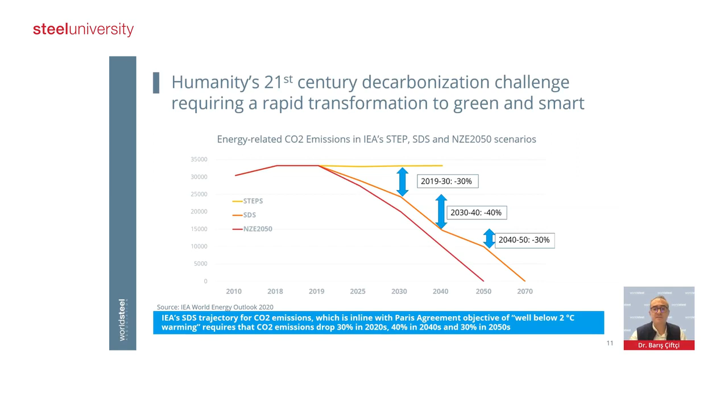And this has to be realized while the global population continues to grow, and probably while the global economy continues to grow too. Such a big challenge cannot be met without a complete green transformation of the world's basic infrastructure and basic economic systems, such as energy infrastructure, mobility systems, and buildings.

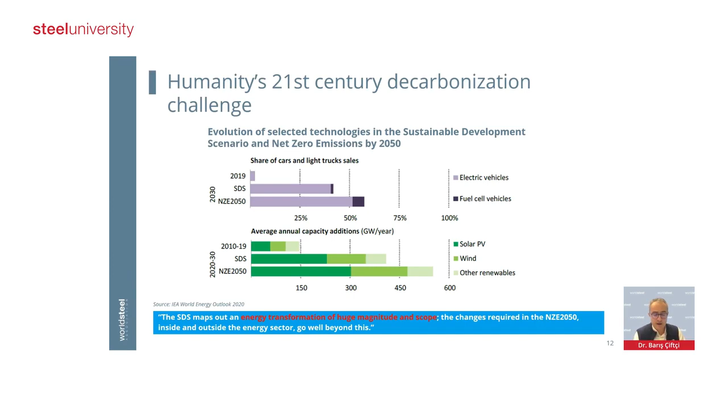We do not know if these targets or assumptions will be realized, but we know that humanity's efforts towards these objectives are going to intensify and accelerate going forward.

Next, I'd like to spend a minute on the new emerging geopolitical order. The geopolitical order of the last 3-4 decades can be described as a unipolar world order. And during this unipolar order, we have witnessed the rise of globalism, with increasing international trade and integration of markets.

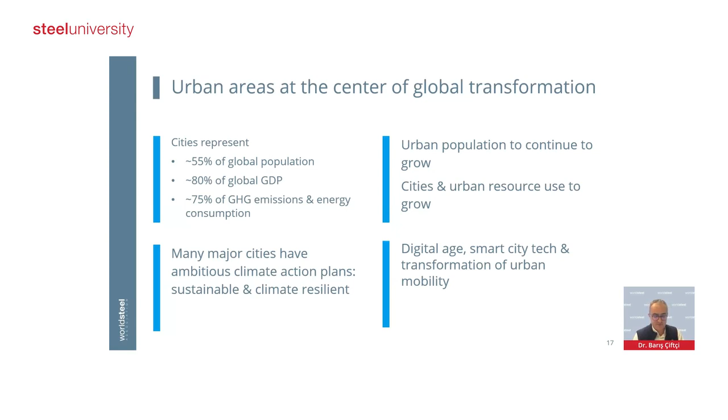First, we expect that governments and policymakers will aim to densify city populations around public transportation hubs, so there will be less need for transportation, especially with private vehicles. This would require building new public transportation networks, as we see in Paris with the Grand Paris Express project, and also allowing for higher buildings around the transportation hubs.

We also expect to see the emergence of mixed-use, multifunction neighborhoods instead of only residential or only commercial neighborhoods, to increase occupation efficiency of buildings and decrease the need for transportation.

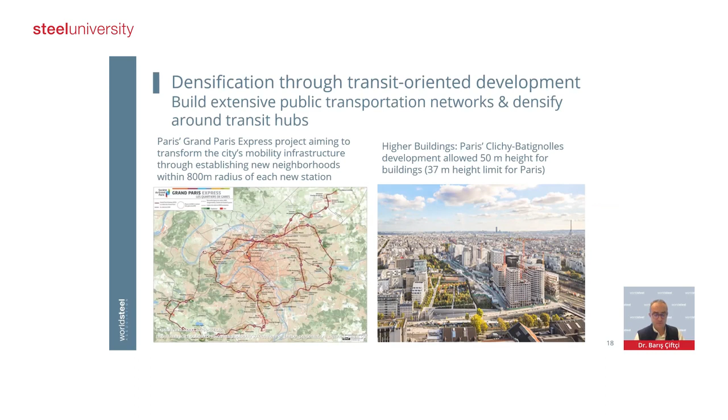Secondly, we expect the energy systems and energy infrastructure of cities to go through a rapid transformation phase, from fossil to green, with installation of rooftop solars, windmill farms, bioenergy projects, and so on.

We expect to see energy demand in urban areas decrease despite population growth and continued economic growth, through renovation of building stock, strict energy requirements for new buildings, and encouraging active, shared, and electric mobility.

And lastly, we expect to see city officials aim for modernization and integration of different energy systems emerging in urban areas.

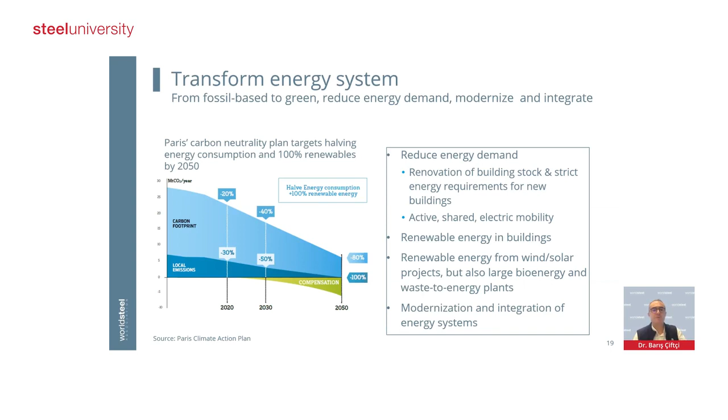Next, we believe that we are likely to see rapid advances in the adoption of circular economy. These initiatives will be growing from a very low base, but nevertheless we see governments exploring different circularity strategies around the world. Material flows for cities are being mapped out, and we see some cities announcing ambitious material use reduction targets.

For example, Amsterdam recently announced the ambition to halve its use of new raw materials by 2030. So the impact of circularity might be expected to become more visible by the late 2020s or early 2030s.

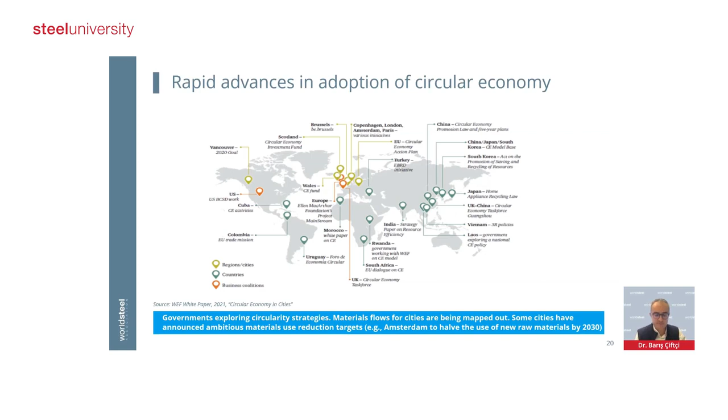As we mentioned, mobility systems are likely to go through a complete transformation too. Urban mobility is being transformed by encouraging public, shared, and active mobility, and discouraging private car use through limiting road space for driving and parking, and increasing car ownership costs.

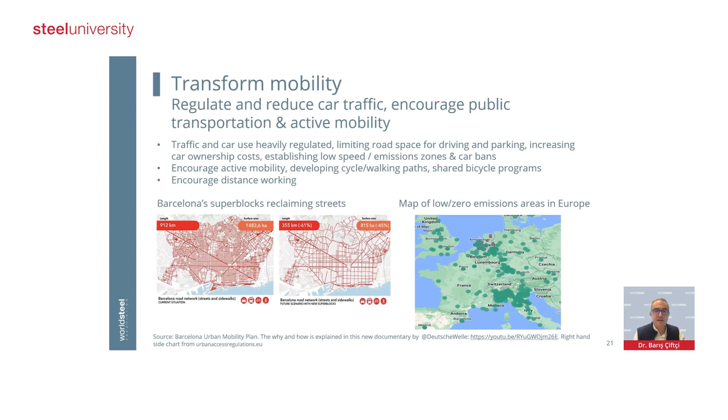And with the advent of mobility-as-a-service concepts and autonomous vehicles, we expect cities to encourage use of shared and multimodal mobility. We have seen the rapid growth of such services over the last decade or so.

So how might buildings be expected to change in the future, and what will be the trends in building design? In short, we expect buildings to get higher and also show much better performance in the future.

New buildings in the future will be subject to strict energy consumption requirements, and they will also generate considerable renewable energy. We expect to see mixed-use, multifunction projects such as mixed residential-office or residential-commercial projects gain further importance. We also expect new requirements such as flexibility, scalability, and modularity to gain ground to meet the demand for increased efficiency and longer lifetimes from buildings.

We expect circularity requirements to grow. Circular designs that allow for reuse of components, and demand for durable, recyclable, reusable products, are expected to grow further. We also expect new circularity systems such as waste collection, water collection, and recycling systems to gain wider adoption.

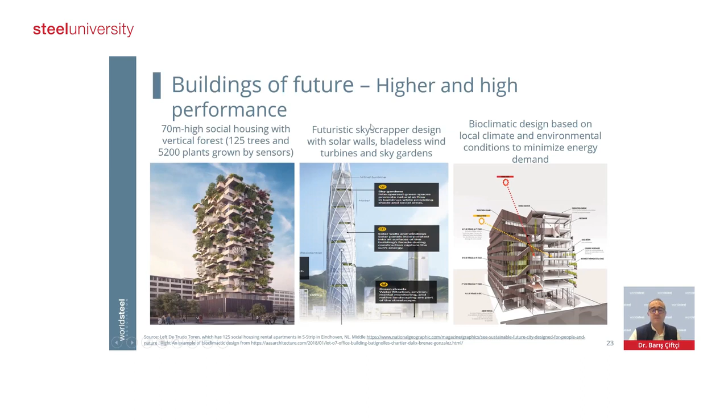So under the light of these findings and expectations on urban areas and buildings, what could be the changes we can expect to see in the construction sector? Well, the construction sector is relatively slow to adopt changes, especially compared with manufacturing sectors. It has a quite fragmented structure, and local conditions play an important role in the selection of materials and construction technologies. Such factors complicate the implementability of new technology or adoption of new materials by the sector.

Nevertheless, we expect the construction sector will be going through an accelerating transformation phase during the next few decades. The sector is the biggest materials user, demolitions are the biggest source of solid waste in many major economies, and buildings are one of the biggest carbon dioxide emitting sectors. That's why the construction sector is likely to come under growing sustainability pressures going forward.

With growing sustainability pressures, we believe digitalization and automation of construction processes are likely to gain pace. And with that, we expect increasing adoption of life cycle calculations, comparison of different designs with respect to their materials use, waste generation, and carbon dioxide emissions performance, and choosing designs that optimize such criteria. With digitalization and process integration, we also expect growing use of prefabricated components and modular construction technologies.

These changes will be significant. However, for materials, we expect steel and cement to remain the main construction materials. The main change we expect to see in materials demand from the sector is rapid growth in demand for low carbon materials, mainly low carbon steel and cement.

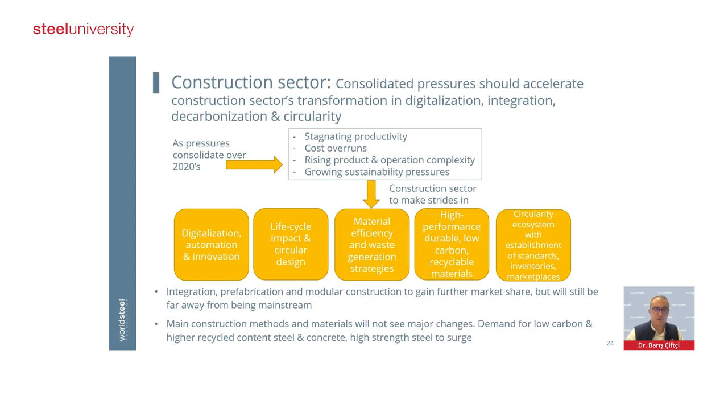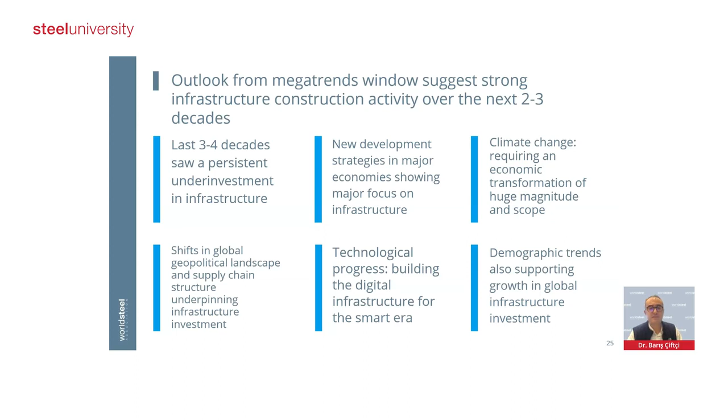When we turn to the construction sector's steel demand in the medium term, we see two quite supportive developments. Firstly, as we mentioned before, we expect strong infrastructure construction activity over the next two to three decades, and this should support the construction sector's steel demand going forward. And secondly...

We believe that most of the changes and trends we explained, and expect to see in construction and building design, are steel positive. The expectations for buildings to become higher, flexible, and scalable, to generate considerable energy, and become more efficient and smart through energy generation capacity, various materials recycling and storage systems, and sensors.

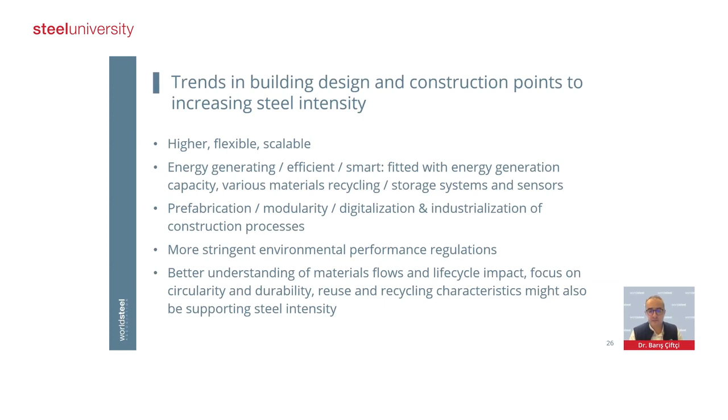The expectation to see growth in the use of prefabricated components, modularity, digitalization, and industrialization of construction processes, more stringent environmental performance regulations, better understanding of materials flows and life cycle impact, focus on circularity and durability, reuse and recycling characteristics, should all be supporting steel intensity thanks to steel's inherent superior characteristics for durability, reusability, and recyclability.

Thanks to these developments, we expect the construction sector will be showing relatively strong growth in steel demand and grow its share further in the global total steel demand. Not only for demand, we expect the construction sector to play an increasingly bigger role also for product development and service improvements, because the sector is expected to become more digital and green, and it is going to demand greener, more durable, more reusable, and more circular products.

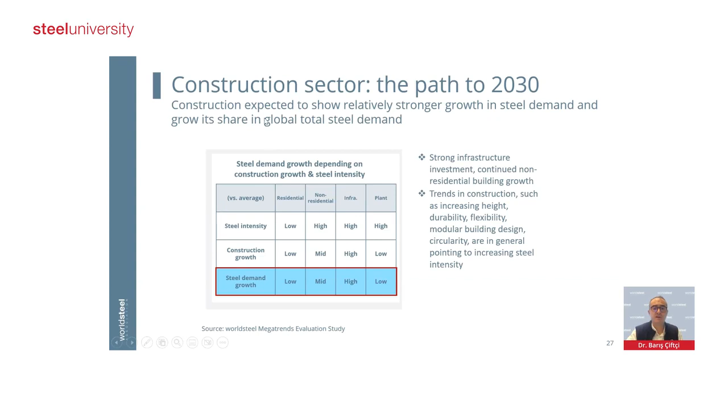Next, how can the megatrends be expected to shape the future of the automotive sector? Well, the automotive sector stands at the inflection point of a once-in-a-century paradigm shift. And this paradigm shift is being driven by three main waves of change.

The first of these is the mobility on-demand applications that entered our lives in the early 2010s, that is having the ability to use mobile phone applications to call for ride-hailing or make use of carpooling services. The second of these waves is the electrification wave, which accelerated from the mid-2010s, that is replacement of internal combustion engine technology with battery electric vehicles or other new energy vehicles.

And the third wave is the autonomous vehicles wave. This wave is expected to gain momentum from the mid-2020s and drive a rapid transformation of mobility systems and the automotive sector.

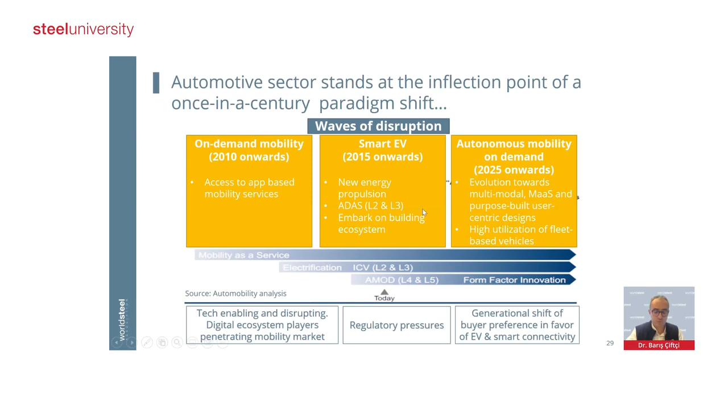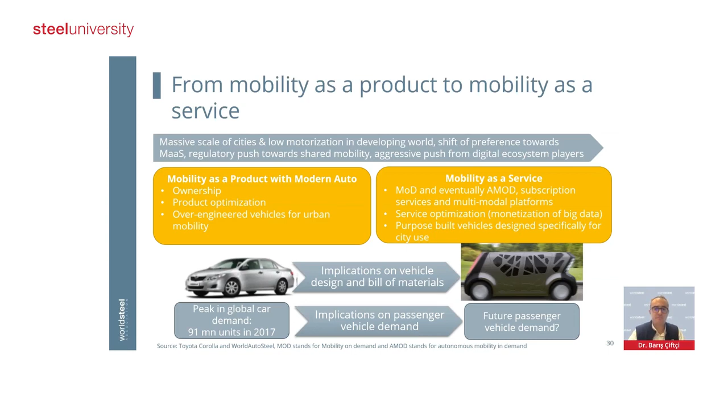The move from mobility as a product to mobility as a service is a real game changer, especially with the advent of autonomous vehicles. It has the potential to result in dramatic changes in vehicle design, vehicle demand, and bill of materials. For example, we are likely to see major changes in vehicle design from conventional designs, which prioritize driver's comfort, to new designs such as shuttles and pods that prioritize purpose of use and efficiency. What will be the impact of this great transformation on steel demand from the sector?

Moreover, we know that electrification goes faster in more premium segments. That is, most of these 60 million internal combustion engine vehicles in 2030 are likely to be in more economical segments, which are steel intensive.

And when we turn to electric vehicles, let's say about 40 million vehicle sales expectations for 2030, we have observed that big selling electric vehicles with conventional designs, such as Tesla 3, have been steel intensive vehicles, and we do not expect to see a major change here. The real game changer for steel demand will be autonomous vehicles with unconventional designs.

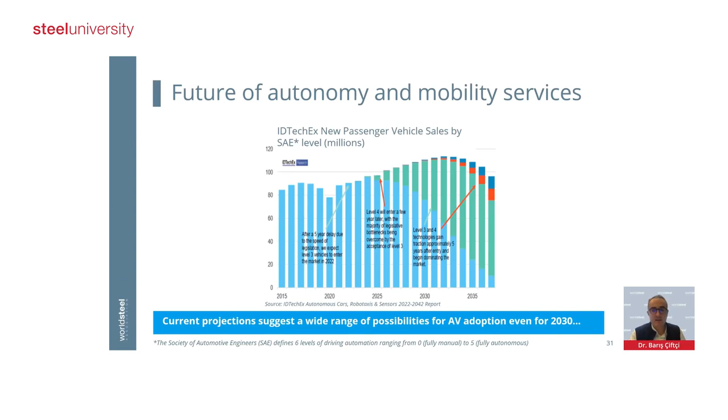And with that, let's move to the last part of my speech today, with a brief discussion on what the vision and agenda for the global steel industry should be under the light of our findings and discussions so far.

First, the markets. Our vision here is, as always, growing along with the markets. We have argued that we should expect to see structural changes in global steel demand. The energy sector, for example, is expected to show strong growth in steel demand. Similarly, the construction sector is expected to represent an even larger share of global steel demand, especially the demand for infrastructure projects. We have also mentioned that we might expect to see the automotive sector start showing accelerating changes in its steel demand structure going forward.

And lastly, we mentioned that demand for low carbon steel might be expected to start showing strong growth, initially from low levels, but reaching significant levels quickly. And hence the agenda is to analyze such long-term trends in our own markets and devise the right investment and growth strategies for our companies.